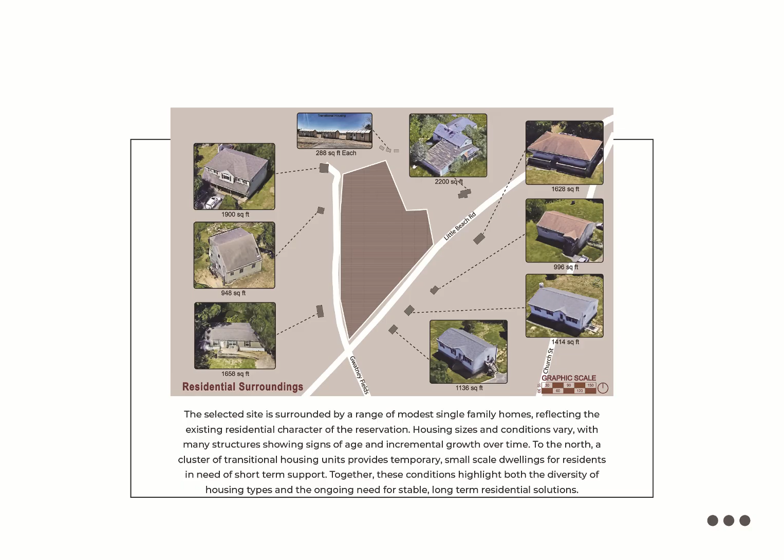The surrounding context is mostly modest single-family homes with a range of size and conditions. There's also transitional housing nearby, which shows that there is already a need for different kinds of housing support.

The project is also planned in phases. Early phases focus on site preparation, circulation, and housing, while later phases bring in the community center, pergolas, planting, and shared outdoor areas. The final site plan is organized around the central community space.

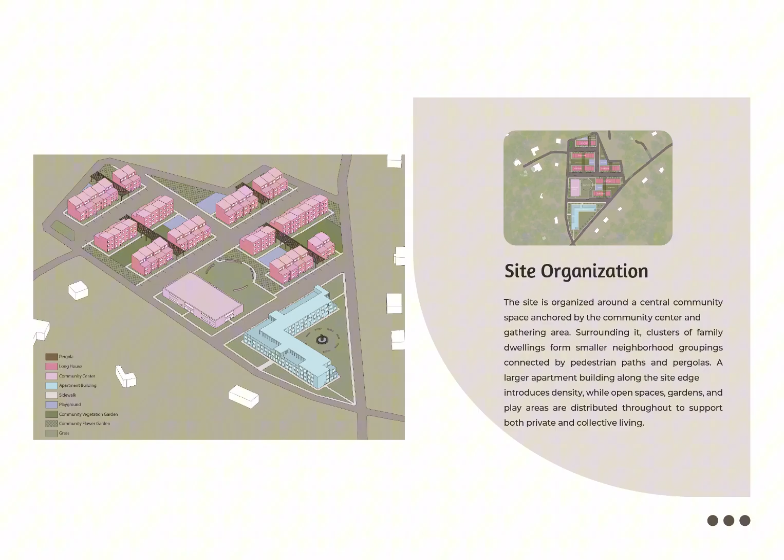The community center and gathering area anchor the plan, while the longhouse clusters create smaller neighborhood groupings. The apartment building sits along the edge of the site, adding density while keeping the center open for shared outdoor space, paths, gardens, and play areas.

The first housing type is the modern longhouse. We're not recreating a traditional longhouse literally, but we're reinterpreting the idea of shared living in a contemporary way. Each family has a private home, but the homes are arranged in clusters so that shared outdoor spaces become part of daily living experiences. Instead of treating each house as an isolated individual, the longhouse strategy uses paths, pergolas, and outdoor spaces to create a small community within a larger site.

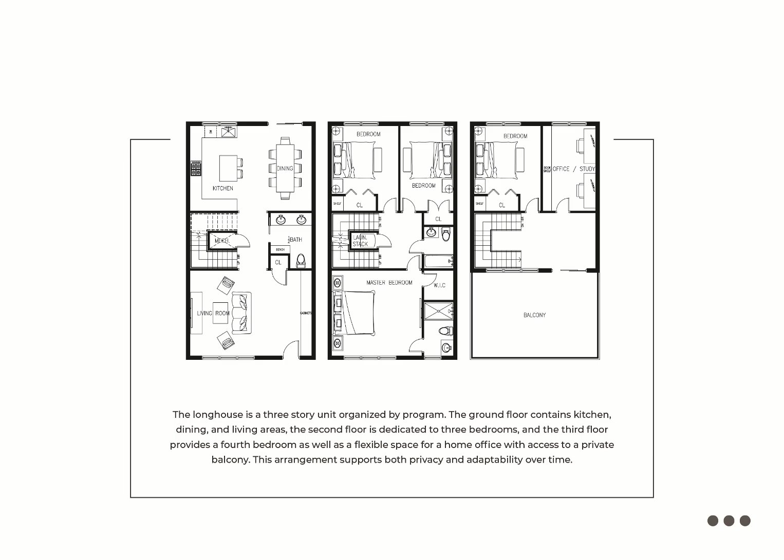The longhouse units are 3 stories and organized by program. The ground floor has the kitchen, dining, and living spaces, so the most active parts of the home are connected to the entry and outdoor areas. The second floor contains the main bedrooms, giving the family a more private zone above the public level. The third floor includes another bedroom, flexible office spaces, and a private balcony.

The construction system is designed around modular panels. Floor slabs, exterior wall panels, and interior partitions create a repeatable system that can reduce construction time and make units easier and more affordable to build.

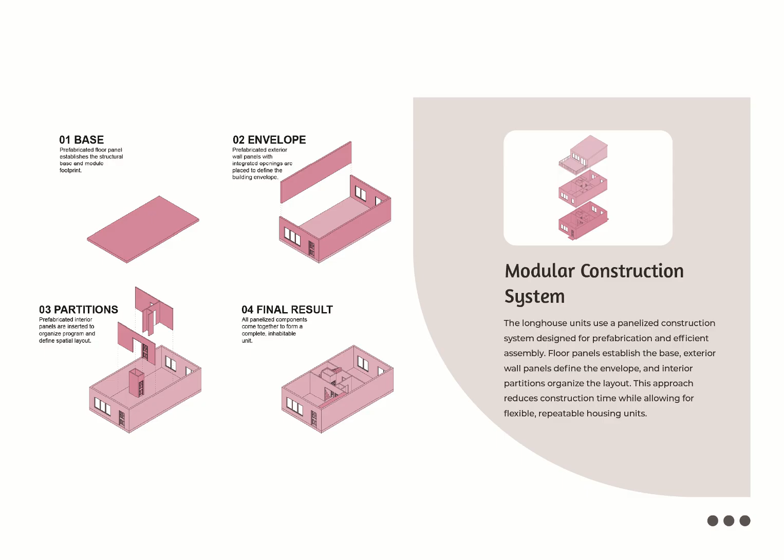The pergolas are also important because they connect the homes together. They create semi-public thresholds between private units, encouraging circulation, gathering, and informal interaction between neighbors without taking away privacy of the home.

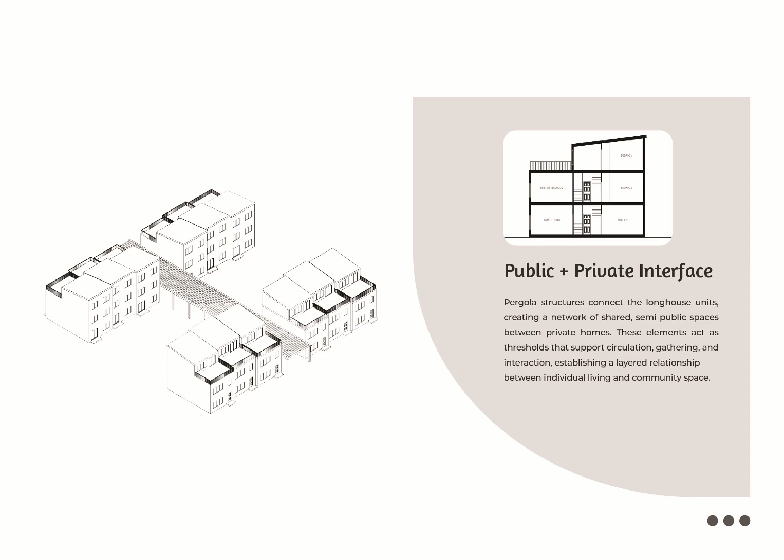Another part of the longhouse design is the solar shingle roof system. Instead of adding solar panels as a separate object on top of the roof, the shingles become part of the roof system itself. This allows the building to generate power while keeping the architecture more visually integrated.

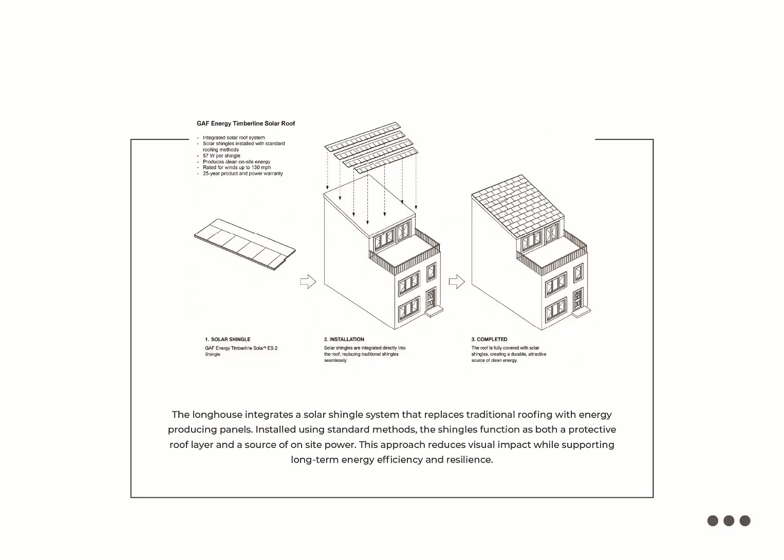The interior spaces are meant to feel warm, durable, and simple. The goal is not luxury through size, but luxury through quality of space, natural materiality, light, and comfort.

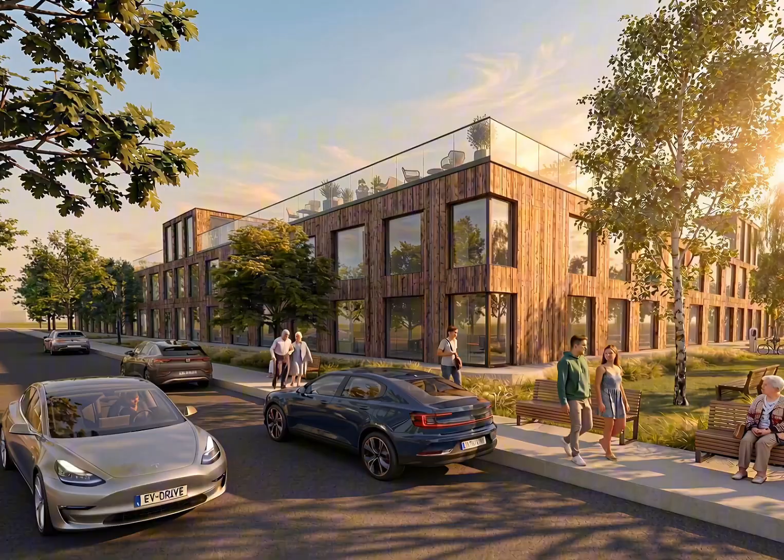The second housing type is the apartment building, which introduces collective housing for individuals, elders, couples, and smaller households. This building expands the range of living options on the site. Not every resident needs or wants a fully family-sized house, so the apartment building includes studios, 1-bedroom units, and 2-bedroom units.

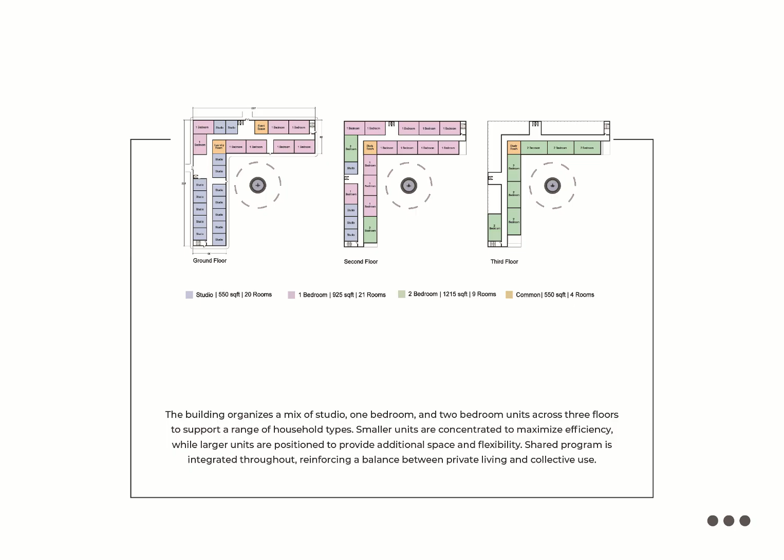The rooftop also becomes an important shared outdoor space. It gives residents a place to gather, relax, and look back across the larger site. The building is organized across 3 floors, with shared circulation and common spaces integrated into the plan. The goal was to create efficient apartments that still have access to light, outdoor space, and the larger community.

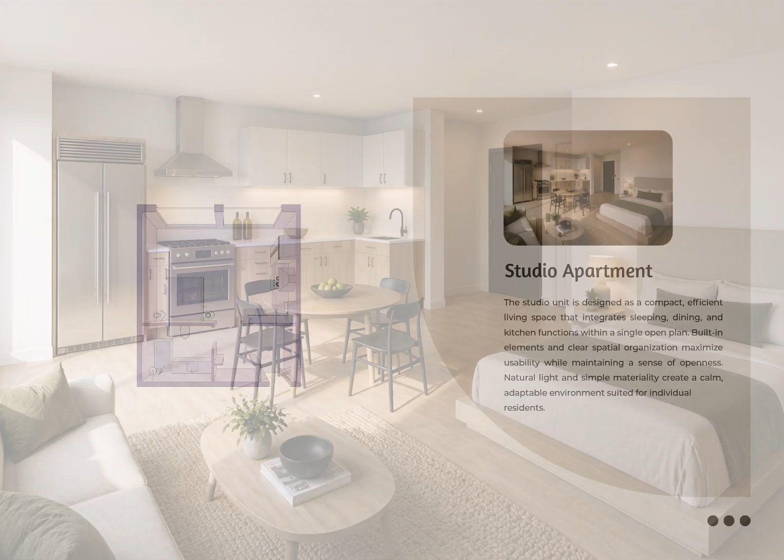The studio apartment is designed as a compact and efficient living space. Sleeping, dining, kitchen, and living functions are combined in one open plan, but the layout still feels organized and usable.

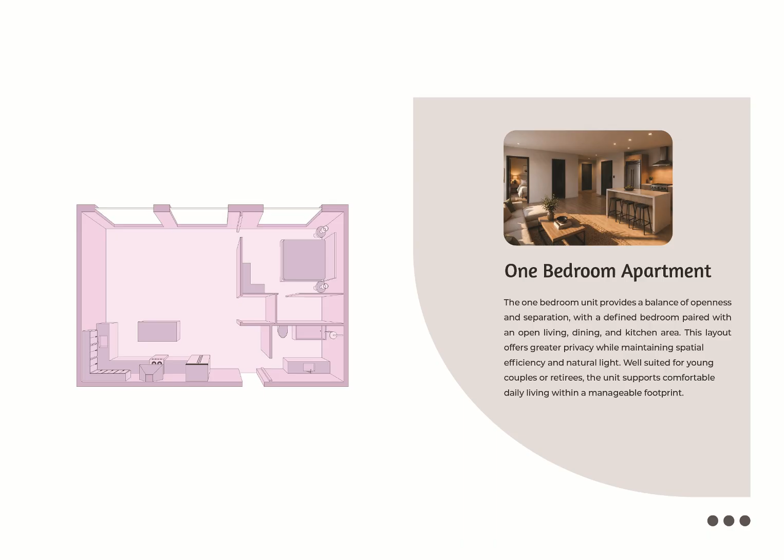The 1-bedroom apartment provides more separation between private and shared areas. It is intended for residents like young couples, single adults, or retirees who need comfort and privacy within a manageable footprint. The 2-bedroom apartment gives more flexibility.

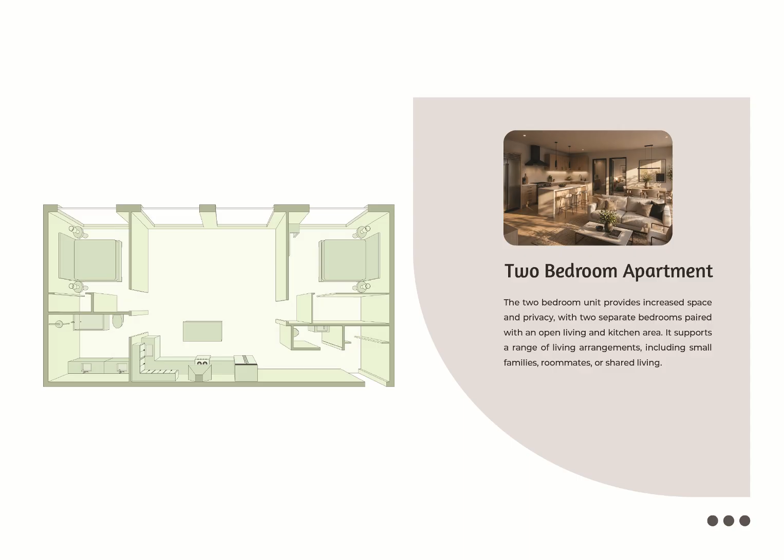It can support small families, roommates, or residents who need an extra room for work. Together, the studio, 1-bedroom, and 2-bedroom layouts allow the apartment building to serve different stages of life.

The third major part of the project is the community center. The building is designed as the heart of the development, supporting gatherings, services, and everyday community life. It's organized around the central gathering hall, with supporting spaces arranged around it.

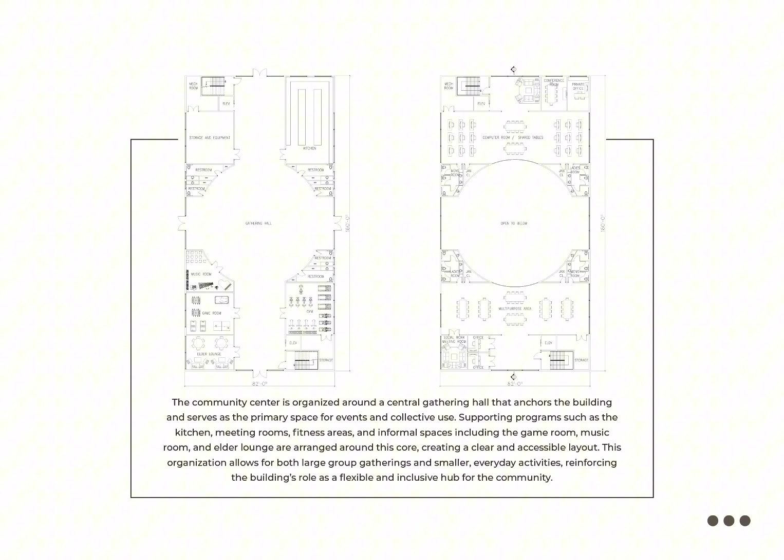These include a community kitchen, meeting rooms, fitness areas, a game room, a music room, and an elder lounge. By placing the community center near the shared open space, it becomes connected to the daily movement of the site rather than feeling like a separate building.

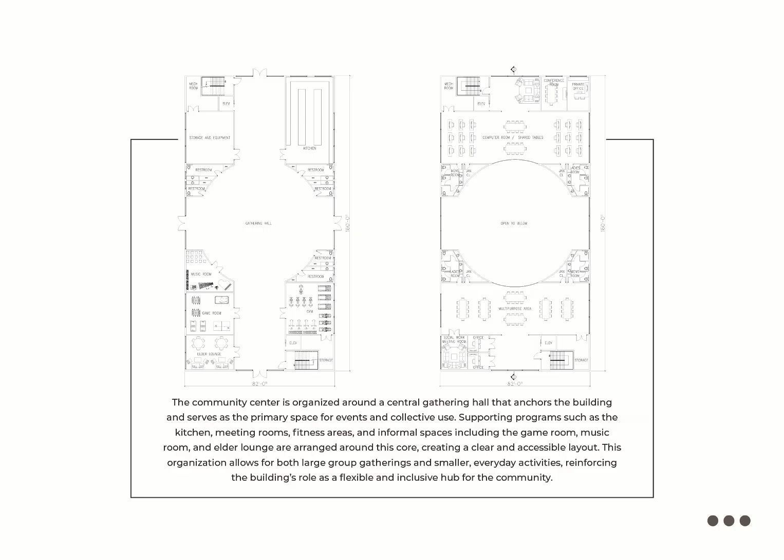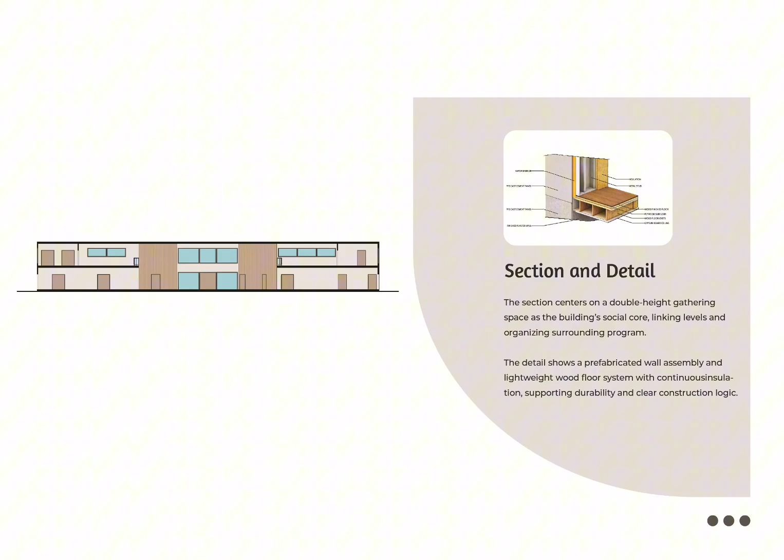Overall, Building Communities proposes housing as more than a collection of units. It brings together family dwellings, apartments, shared outdoor spaces, and community infrastructure into one connected framework. Through the site plan, the longhouse clusters, the apartment building, and the community center, the project argues that housing can become a foundation for both private life and collective community life.